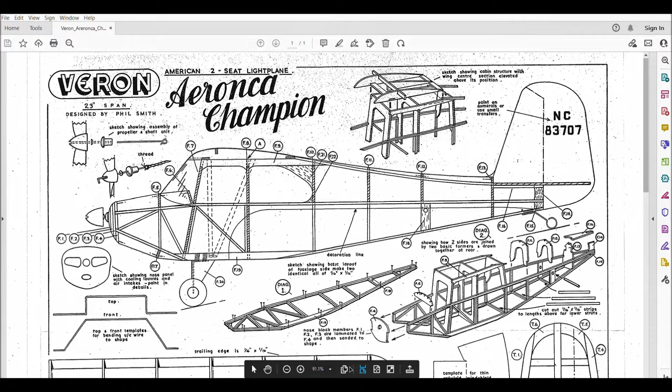Okay, this is the PDF I'm using from an old Veron plan. And I don't need everything, I just want all my formers and bulkheads and such. Oh, I didn't want to do that. What I want to do is just copy here.

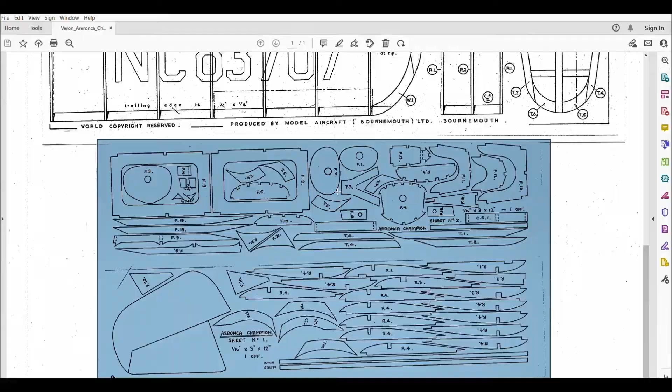And this is what I will paste into Inkscape. Okay, so now we're back to Inkscape. I will just paste the file back in place.

And I know that this is a 3x12 sheet here and a 3x12 sheet here, so that'll be about 7x12 is what I'm looking at. So I'll come over here and make this 7 - nope, I'll make that 12 width, and then 7 high.

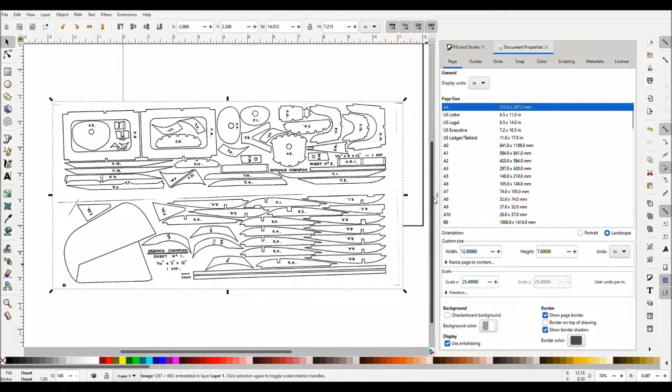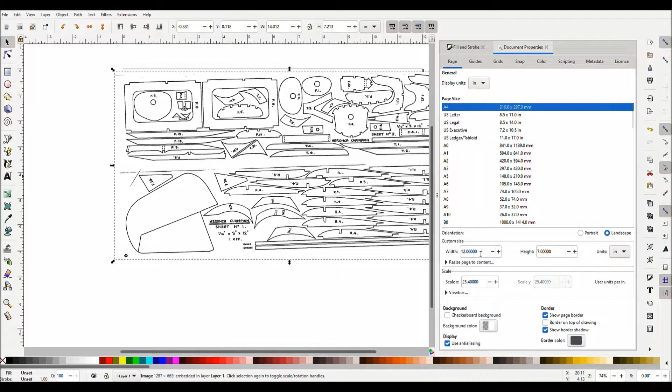And I will use this to close the sidebar. And we can see that this is approximately 7x12, not quite. We'll make it a little wider. Okay, so that's about right.

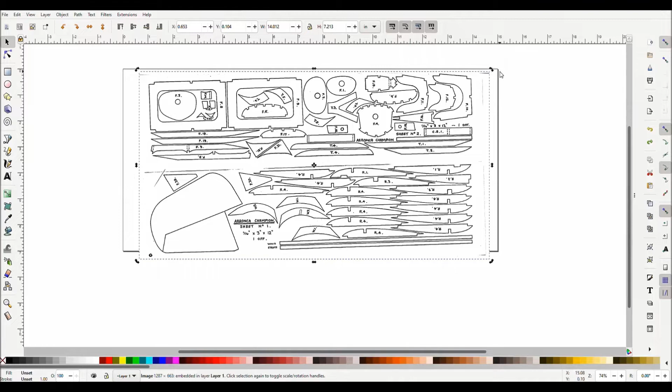But if I look, I see that this is at an angle. So what I can do is, when I select this, if I have my select and transform objects tool up here and click on it once, I can zoom in and out. But I'll just leave it at the right size. If I click on this a second time, I can now rotate. So let's just go ahead and rotate so that looks about parallel. That looks good to me.

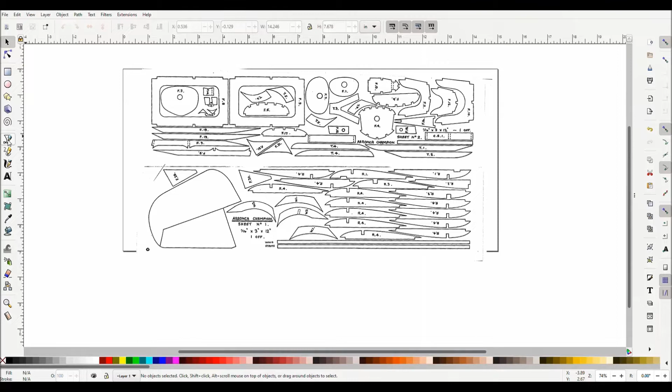So now we have the PDF we want to copy. Next thing we want to use is our Bezier tool. That's what I use to make all my points and vary my curves.

So I'm looking at my drawing and I want to start somewhere. I notice I have a whole bunch of R4 ribs. So what I'm going to want to do is copy one of those or trace around it, and I'll use that as my master. I'll just make more copies and move them around where they need to be on the program. It's important to pick one rib and use that as your master because, as you can see, this plan was hand-drawn 50, 60 years ago. So if you were to look at each one of those ribs and superimpose them, they'll all be just a little different. That's why I'm going to use one R4 as my master, and I'll use that also to compare R3, R2, and R1 ribs against.

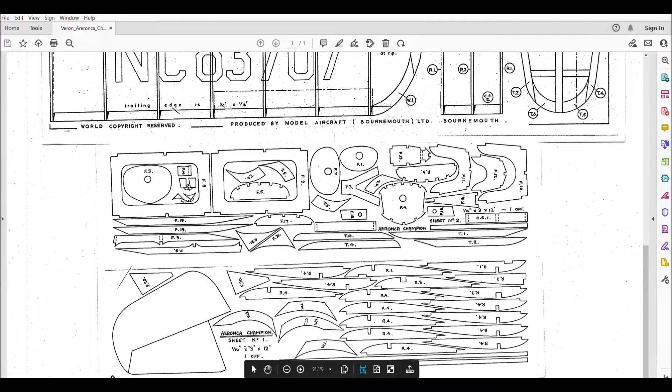Okay, I popped back over to the PDF because I want to make two more observations off this plan before I start tracing. I need to know the size of the cutouts for the spars and the leading and trailing edges. Everything is made out of 1/16 inch sheet for all the parts and for the leading and trailing edge. What I need to know is what the main spars are - the main spar is 1/8 inch by 1/16 inch.

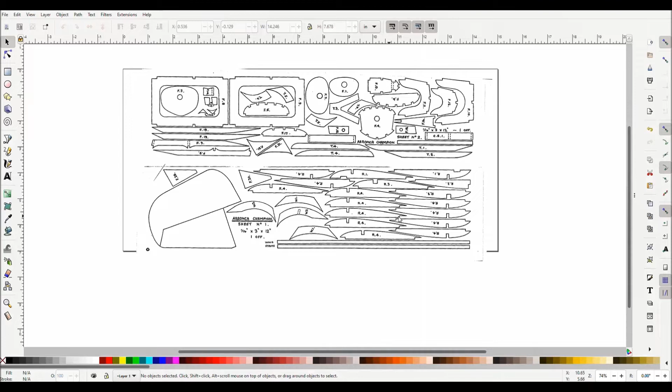Okay, we're back to our Inkscape program, and I'm going to start on my R4 rib. So I want to expand this so it's easier to work on. I have the cursor over it, and I will use my scroll wheel, my mouse, and my control key. I hold my control key, I scroll up, and it expands the screen.

So the fun part is we click on the Bezier tool, pick some point - I'll just start right here. Click on the first point, come over here and click on a second point. I'm going to go a little farther out.

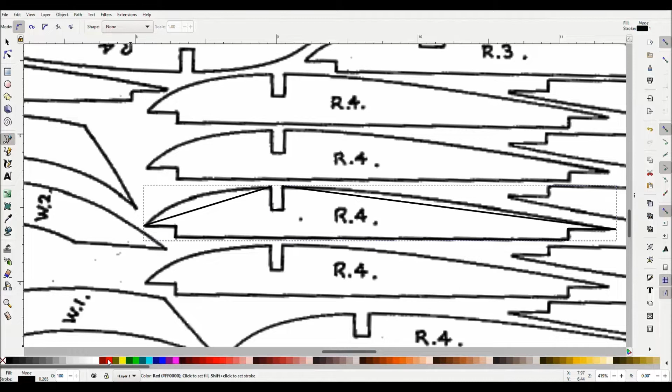Click across to the next point, down, across, up, leading edge, top of the spar cutout, so now I have my points, and it's hard to see in black. So I'm going to change that color. The way I do that is I come down to the color bar down here. I'll use red. So I'll hold down the Shift key and click on that. Now I have red.

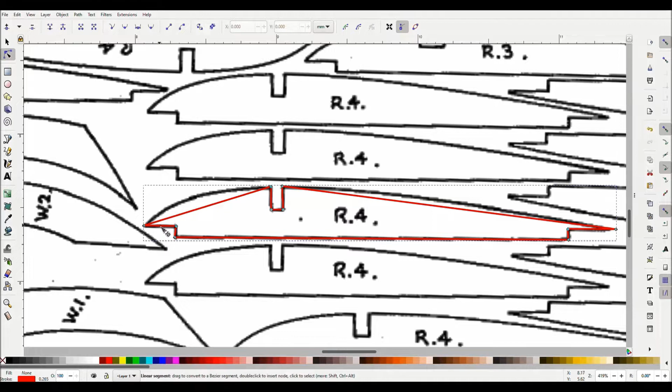So you can see I wasn't really careful about where I made the point because I knew I was going to be moving it later. So we go from the Bezier tool up to our Edit Path by Node tool. So you can see all the different little nodes there. So click on that. Now you can see all those individual nodes. And again, I'm going to use my scroll wheel and my control key, make it a little larger. And I'm going to make those nice and parallel.

And I said it's important before to know the rib size. So it's 1/16 inch by 1/4 inch. I'm sorry, that was 1/16 by 1/8 inch spars. So what I want to do is I want to measure across here to make sure it's 1/16 inch. And 1/16 inch is 0.0625 inches. So I'm going to do 0.07 inches. So I come down here to my ruler, click on that, and you can see a little X popped up. I can just come straight across, and I'm 0.08, I wanted 0.07.

So what I can do is I can just come back up here to my Edit Paths selection, and I'm just going to make that a little smaller. And I'm kind of clumsy, so we'll see how I do. Okay, that looks about parallel. Maybe a little off here. And we'll come back to our measure tool again. And we'll measure across. And I'm still at 0.08. I'm trying not to move too much. I have a tendency to overshoot when I'm doing this kind of thing. So that looks parallel still. Well, not quite.

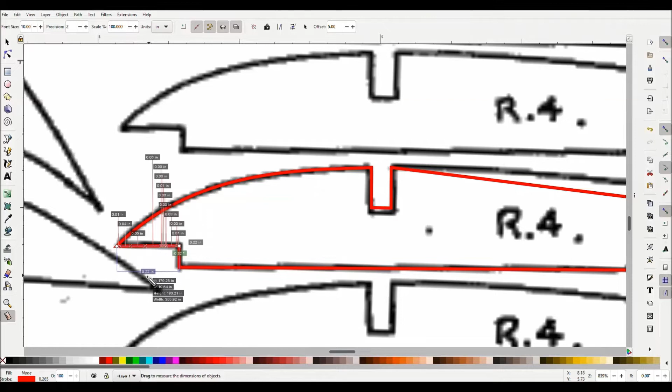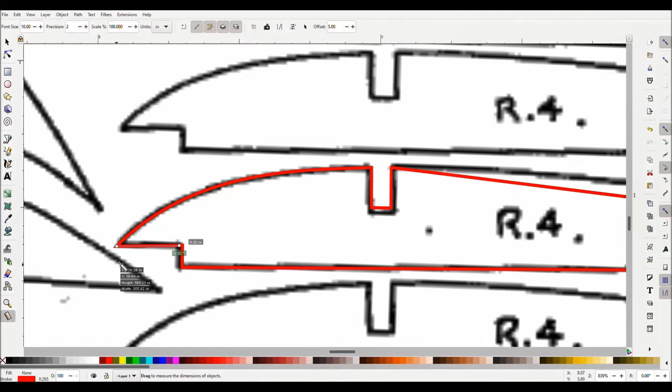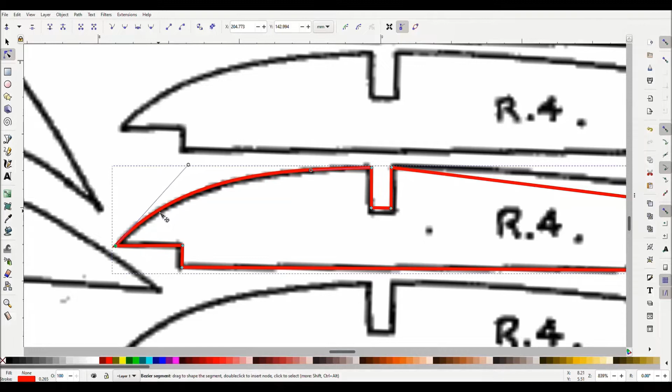And of course it should be 0.25. So we'll just say, ooh, 0.32, that's kind of long. Sorry, no, 0.22 right here. 0.22, we want 0.25. So let's go to 0.26 so we have a little leeway. And I give a little bit more. Go to our measuring tool. 0.23, we're still a little short. Let's move this forward point up a little bit. We'll measure again. .24, we're almost there.

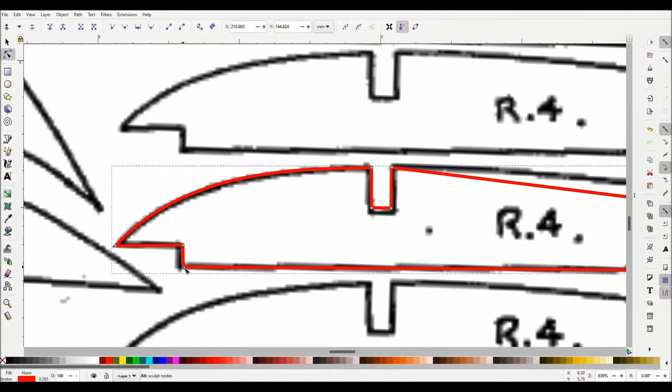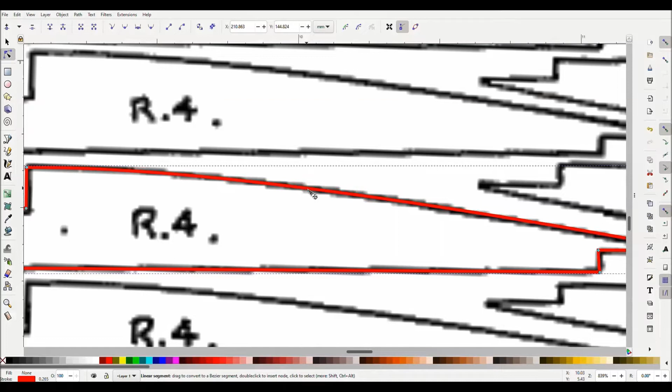Well, we'll leave it so that if it sticks out a little bit, it'll be a little more to fair in. That's close enough for me, and that looks a little off, so I'll bring it straight down. Okay, that's that front point. So now let's go over to the trailing edge. We'll just bring it over here. Okay, that looks about right. The reason I bring this out past where it stops on the drawing is just so that it is so sharp here, you got a little bit of wiggle room for when you round off that back end. So we need to make this match. We'll go ahead and just bring this over a little bit and bring it up to match. There we go.

And again, 1/16, we want that about 0.07. And it is 0.07, and we want from here to be 0.25. And we don't want to go back to this point. We're kind of long. We want it to be right about here. So let's bring that point in a little bit. And we'll move this back and see what we get.

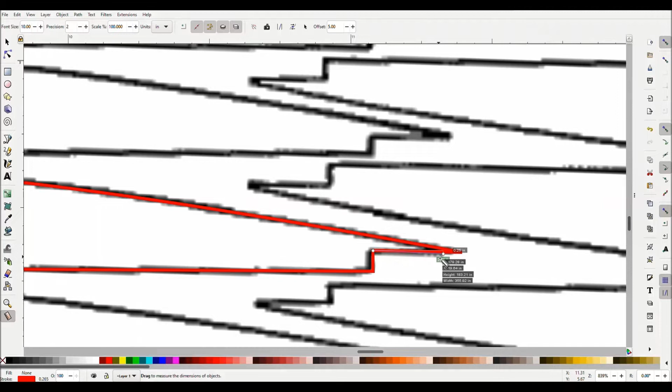And yeah, that looks about right to me. And you can see it's right about even with the outside of that black line. So we have our height and our length right for our 1/4 by 1/16 trailing edge. So now let's just take a quick look, see if it looks good to us by doing Control and scrolling down.

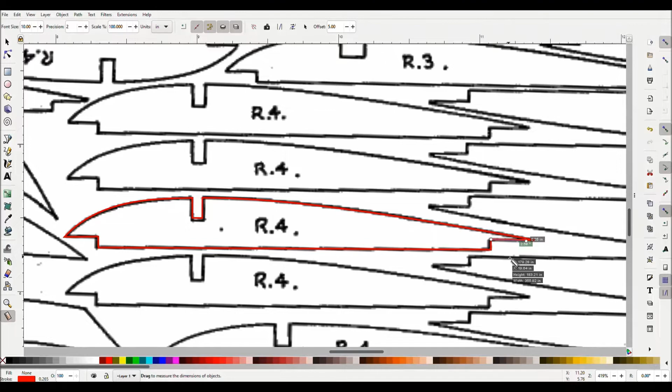Yeah, it doesn't match the black lines very well, but like I said, this is all hand drawn a long time ago and copied and copied and copied. But by doing the measurements, we know this is the right depth, that's the right length, and that's the right length. So that's how I do my initial rib, and that's going to be my reference rib. Okay, now we have our reference. We have the fun part. We'll just use Control and scroll wheel to make this a little bit smaller.

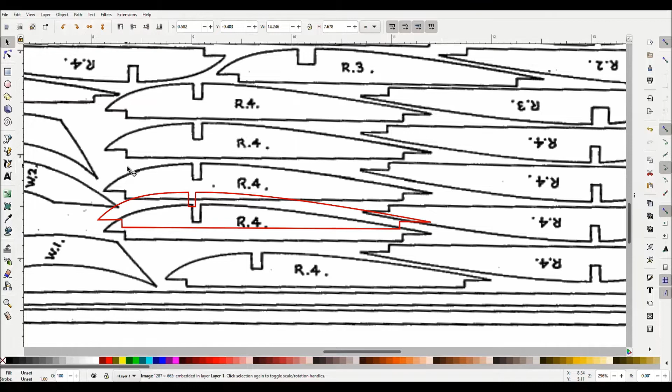We're going to do the select. I want to copy this all around here. Next comes probably the key combination I use the most, which is a duplicate. So when I have it over this highlighted square, I do Control D for duplicate. And now we're going to use my second most favorite, Control Z, which is undo. So I do Control Z and it snaps back. I had the whole PDF highlighted rather than just the one rib. So now I have the one rib, I will do Control D again and move it up here.

And you can see it's a little off here, but the mismatches are different on this rib. So let's do another Control D. Move it up to this one. And you can see the mismatch is a little different here. So when these are all hand drawn, each one of those ribs is drawn by hand, and none of them exactly match. That's why I did one reference rib, so they will all be perfectly exact.

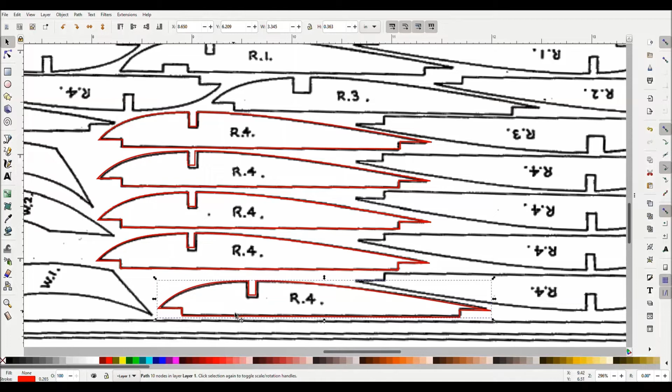So let's Control D, bring it down to this R4 rib, another Control D, bring it down, up, wrong again, so Control Z or Zulu, and then back in where I want to be. I'll highlight, Control D, I move it, and again you can see the mismatch is a little different on this rib. I'll zoom out a little bit. You can see I have to do 1, 2, 3, 4, 5, 6, 7 more.

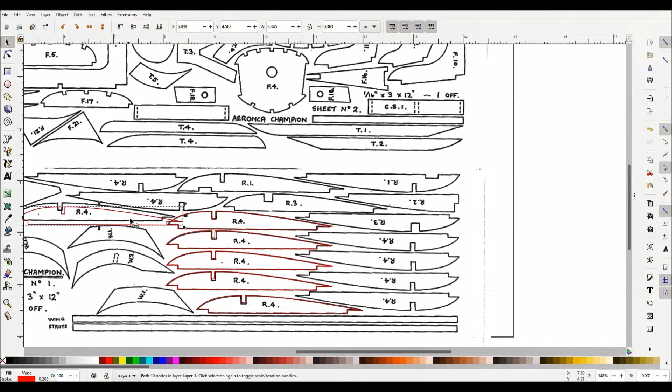So I'll Control Delta, and I'll move this over here. I'm having a hard time because it's trying to match these 2 points. So if you have that problem, just use your scroll wheel to enlarge the drawing. And I'm going to bring it over here a little farther. Because I have these 2 cuts overlapping, I don't want this cutting into that rib. So I'll move this one back just a hair. And it's not going to matter if it doesn't match the PDF, because we're going to be moving that out of the way and just show our rib profile later.

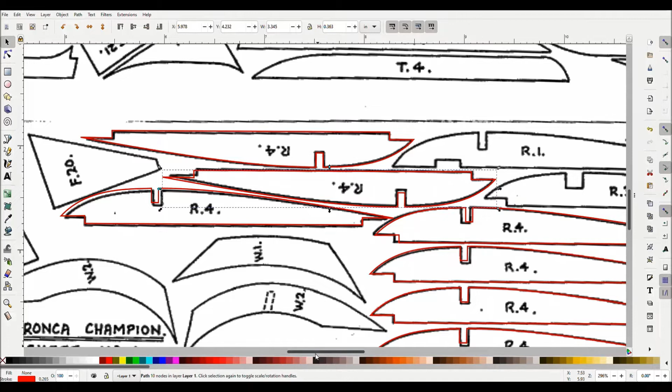So now we have all these upside down R4s. So I'm going to Control Delta, move it up, and I have my rotate up here at the top. So I will rotate 90 degrees and bring it down. Again, Control Delta. And bring it here. I'll do a Control Delta. I'm going to bring it down over here. And I know this gets repetitive, but it's necessary to make sure we get everything exactly the same.

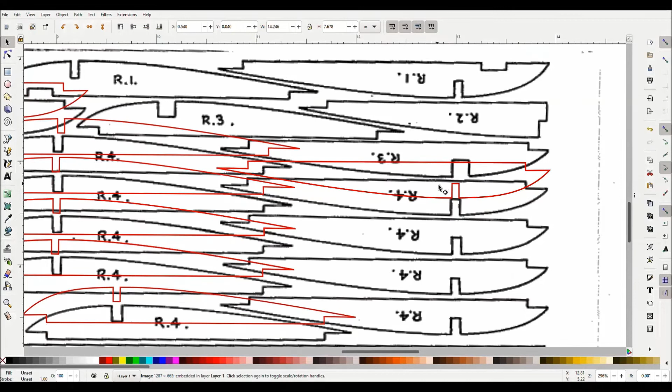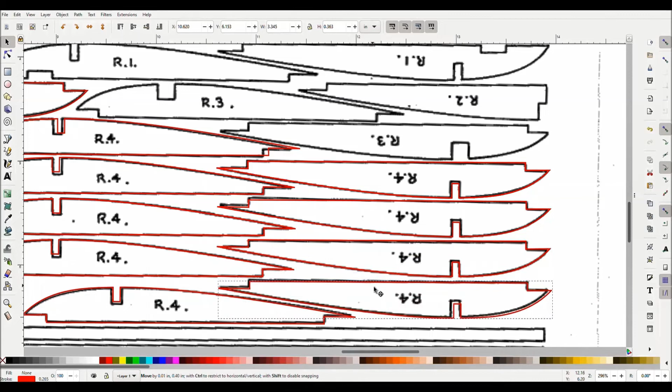Control Delta. Up. I got my PDF, so I'll do Control Zulu. Put it back where I want it. Highlight. Control Delta. Move it down. Highlight. Control Delta. Move it down. Control Delta. Drat. And I believe this is the last of our R4 ribs. So Control scroll wheel to zoom out. Okay, so we have all of our R4s.

Now, I said this is going to be our reference. So we have our R1, R2, and R3 ribs. If we look at our PDF, on the wing we have our R4 ribs and then an R3 rib. That makes the individual wing panels. The center section is made up of the R1s and R2s. But if you look closely, the spars for the center section do not match the spar of the wing panels. And that's intentional. They want this to overlap that when you're gluing it all together. But the trailing edge on all of these match. So that's going to be our reference point. So let's go ahead and go back to our Inkscape.

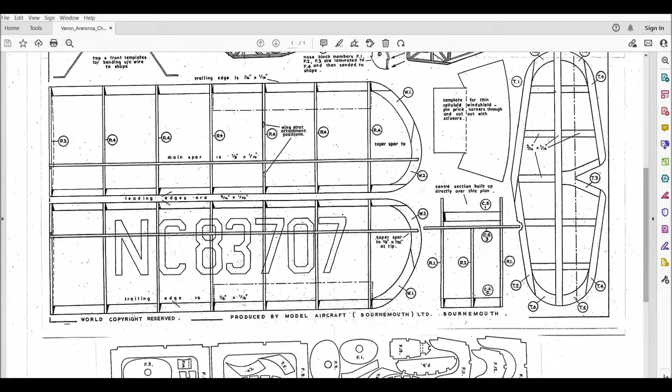Okay, we're back to Inkscape. And I know this is all kind of boring, and I wish I could make it more exciting, but I'm just not that exciting of a guy.

Once we get through the wing ribs, that's going to be the most tedious part. Then I'll go over a couple more parts, and they'll demonstrate basically how we do everything, and you should be able to extrapolate from there how to do the rest of the drawing. So now we're going to do our R3s and R4s together. And it's easier for this next part to change to a different color.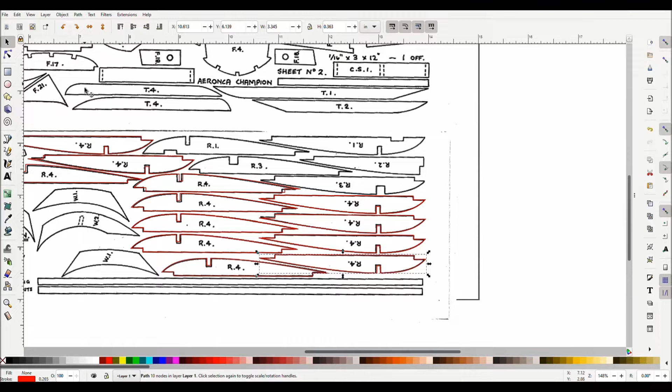So we're going to use our Bezier tool right here. And we're going to expand our R3 rib. So Control scroll wheel. And I'll start the nose this time. Click the spar. Notice this is much wider.

And I'm clicking at all the different points. And notice when I bring it here, the block turns red, and I click on that, and it tells me I've closed it all. So now that I have this, we said we don't want black. But since we're going to be doing some comparisons, we don't want red either. So let's pick a different color. I'll come down and I'll pick green. So I'll do Shift Green to get the outline. It's important you do Shift Green, and I'll show you why.

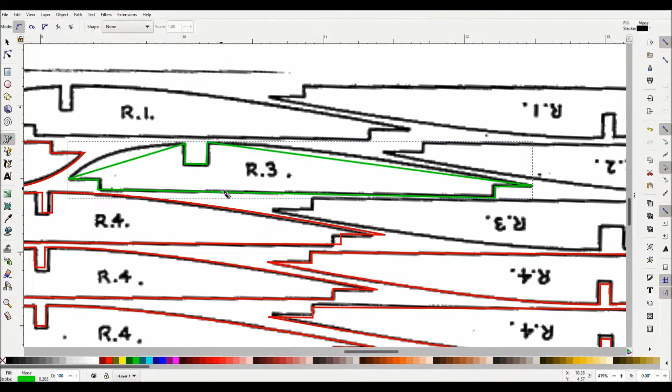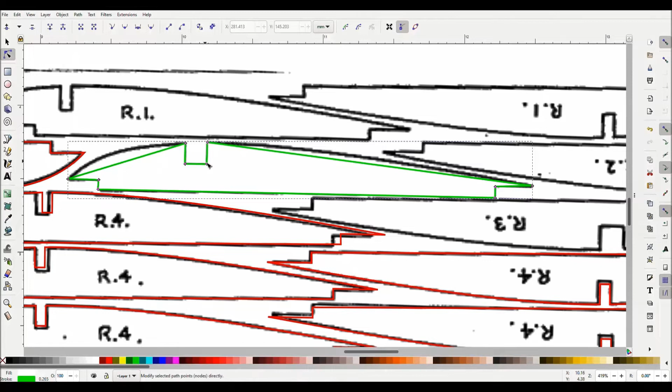We'll go back to black. And if I just clicked on green, I now have a solid, which isn't bad, it's just not what I want. So I'll click down here on white, and then I'll do my Shift Green. Okay, I have the green outline I want. I'll come up here to my Edit Paths, and we said this is 1/8 inch deep. 1/8 inch is 0.125, so we'll do 0.13.

So we do a quick measurement. That's 0.15. It's a little deep. So notice I move this, that little dotted line moves up and down. I want that line not to move at all, so it tells me that my spar depth is the same on front and back. So I need to go up a little bit. So 0.125 was what I wanted.

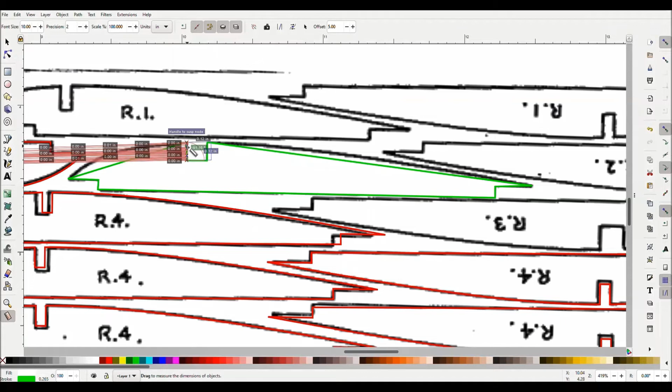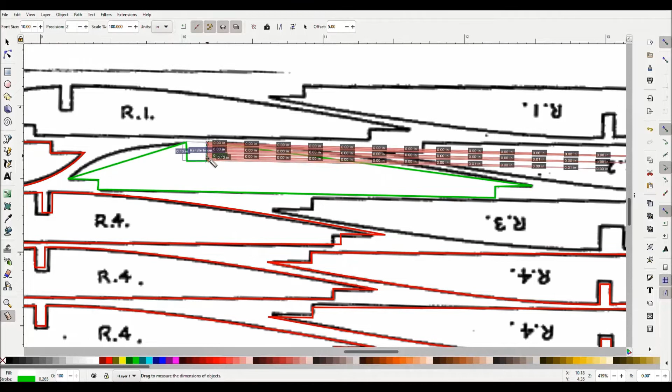Let's do this side. 0.14. And 0.14, and I'm looking for 0.13. So up a hair, that's probably a little too much, but we'll see what we get. Yeah, it was 0.12, that's a little too much. Nope, 0.13, 0.13. Okay, so we have the right depth.

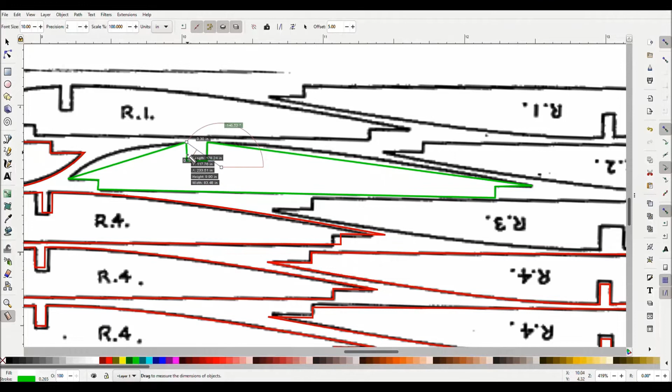Now the width. Remember I said we're going to have the 2 offset spars. Well, we have to have room for the spars from R4 ribs and also the R2 rib, the R1, R2. So each of those are 1/16, so I should have 1/8 apart. So this should be 1/8 of an inch, 1/8 of an inch being 0.125. We'll do again 0.13 if we can.

So 0.14, and this one seems a little larger, 0.15. Okay, so let's bring this back a little bit. And we're gonna come back to this later. I'm trying to get general. The reason being, we're gonna compare this to our R4 rib, since we said R4 was the master. So let's just go ahead and finish doing all our fairing in, and then we'll come back to that.

So let's do the front first. Let me just come down a little bit. And I click on that center green line. And I'm getting close. Doesn't have to be exact because I'm going to be changing it in a minute. Okay. Come back here. That's close. It's close. Okay, so this is my R3 rib. So I want to make sure that the R3 rib and the R4 rib shapes are the same.

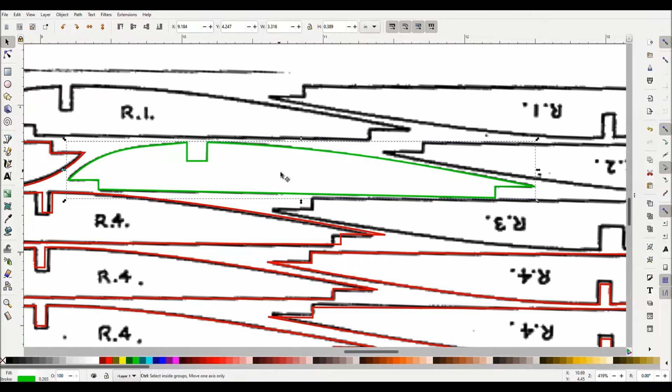So I'm going to take this one. This just move off the side. Let's take an R4 and let's make a copy of it. Control D. And move it over here. Okay, so now I have them together. Let's expand that using Control Scroll Wheel. Oh, a little too much. And now I'm going to do a comparison between the two. This will be my master. This has to match the curve of that.

So what I'm going to do now is I'm going to take my R3 and you can make it, I don't want to match. Well, I guess I can match at the top and work our way from there. So you can see they don't match that well. So let's go ahead and take our, let me click here on the green. And this is pretty cool.

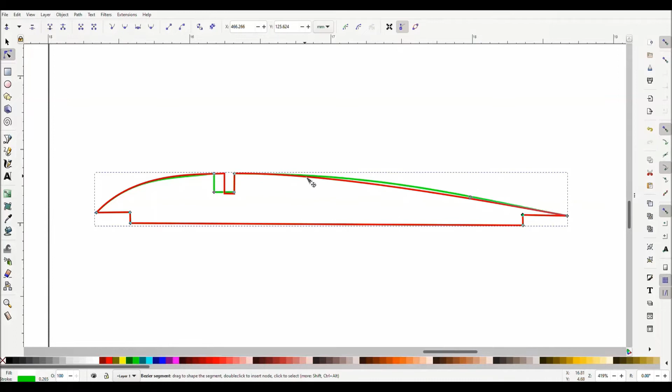All I can do is do snap, snap, snap, snap. Grab that green line and make it so it exactly matches, or as close as we can get. Same thing up here. And snap. And now we're going to grab this and make it nice and parallel. And let's see if we can make that curve a little better.

So now, except for the spar cutout, R3 and R4 are identical. And that's what we wanted. That's why we had R4 as our reference rib. Now we'll just take our R4 rib. Oop, I didn't mean to do that. So again, let's go Control Z. Control Z undoes what you did last.

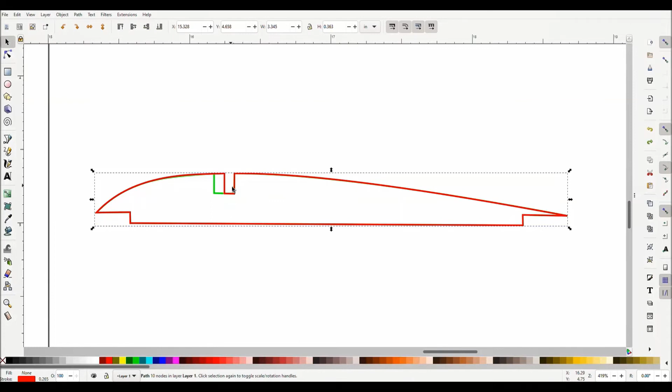And I'll do my select. Gonna select and just get out of the way. Now I don't need that anymore. I can just hit the delete key, and it's gone. That's one of my favorite keys when I'm working is delete, or if I made a mistake, Control Z brings it back. It's very forgiving. That Control Z is an awesome thing. But let's go ahead and make that go away.

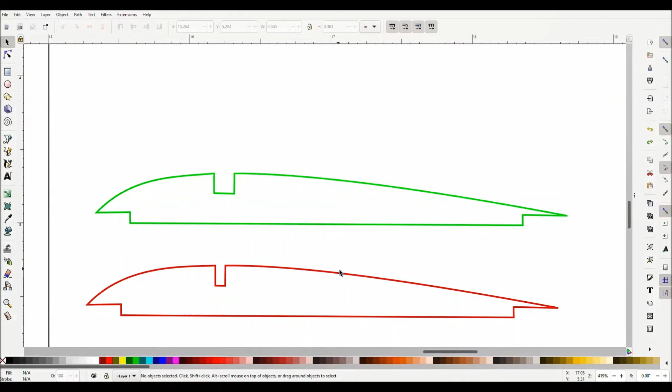So I know that these are right. I know that these are right. I know the height's right. I just need this width to be 0.13. So I'll come over here and let's measure. 0.14 is a little wide. So I'll come here. Do a quick measurement. Still a little long.

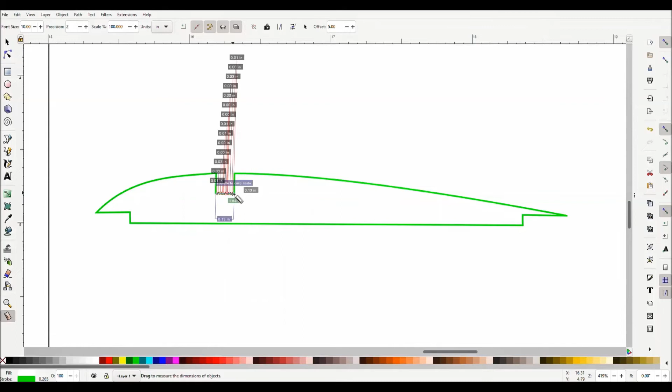So again, we don't want to touch this one because we match that to our R4 rib. Oh, 0.13, 0.13. So it's exactly what I want. And if you're wondering why there's a gap here and not back here, that's because when I rotated the whole drawing, I didn't get it exactly level. And we can fix that later, but it's not really important.

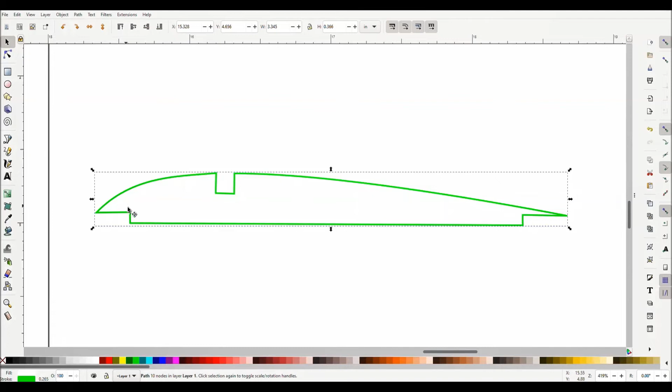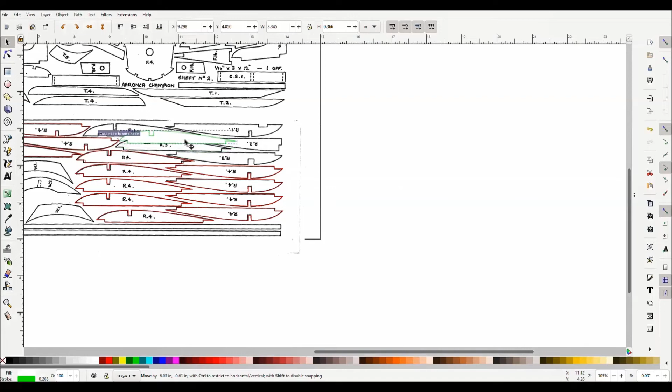So I will use my control scroll wheel. I'm going to scroll down. Up a little more than I wanted to, but I just wanted to get to where I could see everything. So I'll control scroll wheel back up. Select using my select button. So I selected it. I hate when I do that. So I'm going to move it over now for my R3. You can see it trying to snap together like it did a minute ago, those other nodes. So we'll expand it a little. And now it's where we want it to be.

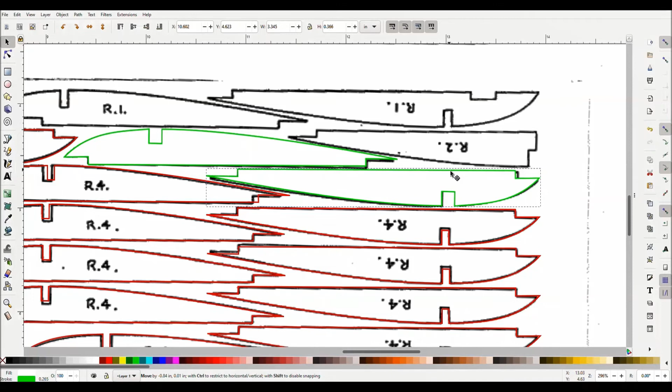Notice we also have another R3. So we will Control D. I hate when I do that. Control D. Move it over. And then we'll use our rotate to rotate it 180 degrees. Then bring it back in. Okay.

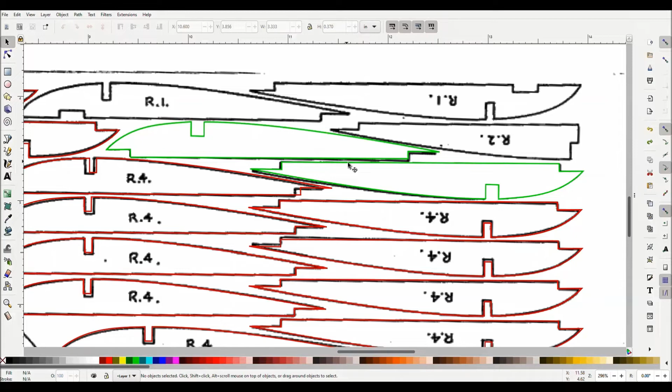Okay, now that we've done R3, let's just jump up and do R1. So R1 and R2 are our center section ribs. And they're going to be very close, but they won't be exactly the same as our R4 rib. So I probably should have left the R4 reference rib off to the side, but we'll go ahead and do that now. I will select R4, and I would just move it off the side. Leave that there for now for our reference. Now let's do R1.

If you remember, I was saying that the wing spars for the center section R1 and R2 are offset from R3 and R4, and we'll see that in a minute. So let's go ahead and do R1. We'll do our Bezier tool, and again we'll start at the front. And notice where R4 has that front leading edge cutout, R1 does not. So that's going to get to us in a couple minutes. We'll see that.

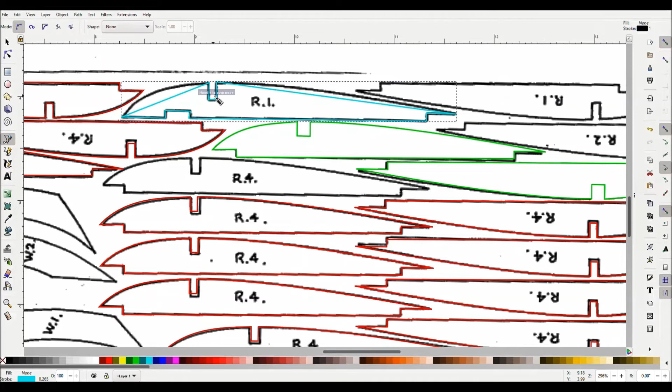So click, click, click, and when it gets to red, I'm ready to close out the loop. Okay, let's pick a different color this time. Let's use the light blue. So shift, left click, now I have a light blue. So we'll try and match these up a little closer this time. I'll go to my edit, and let's zoom in a little bit. Okay, let's see if we can get that.

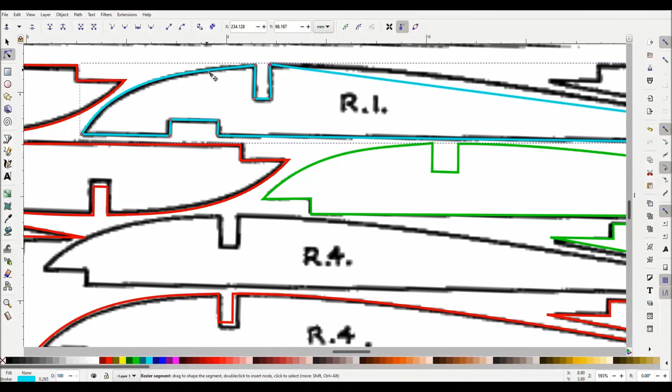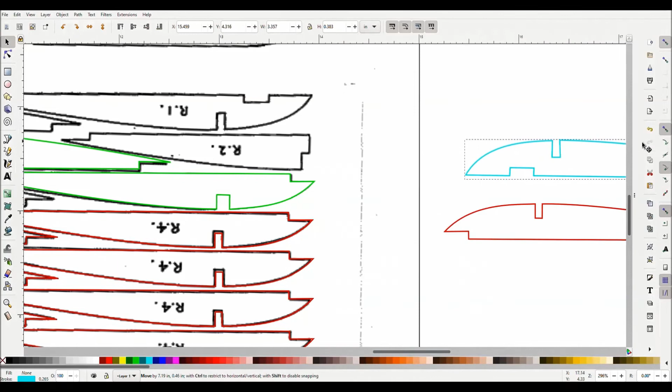And these need to be close. We'll do a little tweaking a little later. Okay. That one up there. Okay, it looks about right. So now we'll go ahead and move this over alongside our reference point, which is the R4 rib. And now I'm going to just superimpose. And they're close. This one's kind of at an angle.

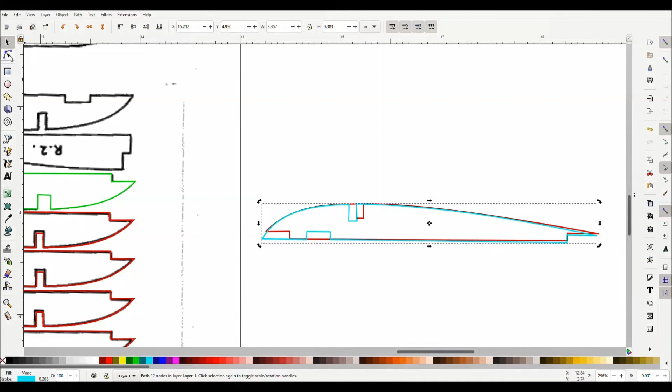But notice we were saying that the center section spar is forward of the wing panel spar, and you can see right there. So now I'm going to start the back. Just snap, snap. Oh, sorry, wrong one. Let's get this back over again. Have to use my Edit Paths tool in the upper left. So now I can snap. So snap, snap, snap. That's snapped. I'll bring this up. And let's zoom in a little bit and get that right on.

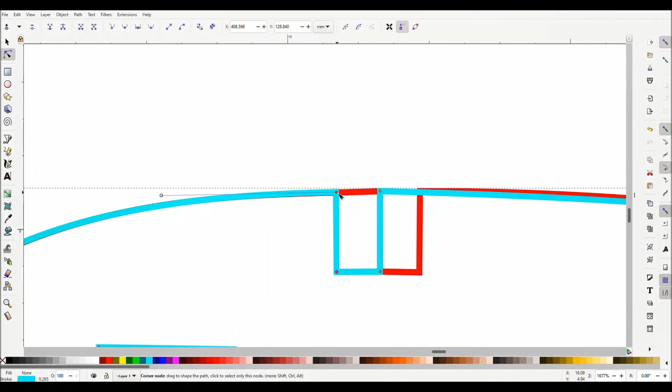And here it's going to be a little different because you can see this is going to come all the way down to where that 1/4 by 1/8 would be. So let's zoom in a little here. Okay, let's bring this up a little bit. Bring that one up a little bit. And let's bring it over the side a little bit. There we go. I don't know what I did. I don't know this program that well, so let's just snap away from it real quick. And there we go. That's what I wanted to do.

Like I said, I don't know anything about Inkscape other than what I've played around with, and this is not a good Inkscape tutorial. This is just showing what I do on mine that I am self-taught.

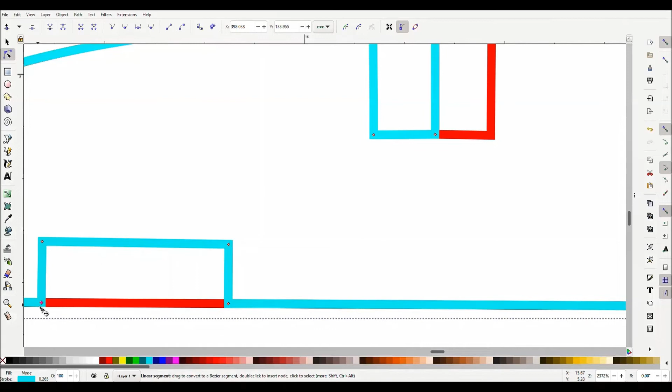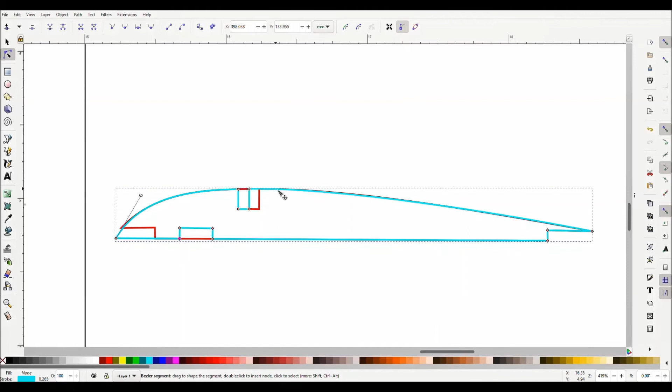Okay, let's go ahead and zoom out. Come over here. Well, let's do this. Let's make this match. There you go, that's pretty close. Close enough for the model we'll be making with this. So now I have to bring this in. I didn't quite want that, but

As you can see, I'm not very good at this yet. So forgive me if I'm not very good at it just yet. Yeah, you get the idea. I'm just not that good with it.

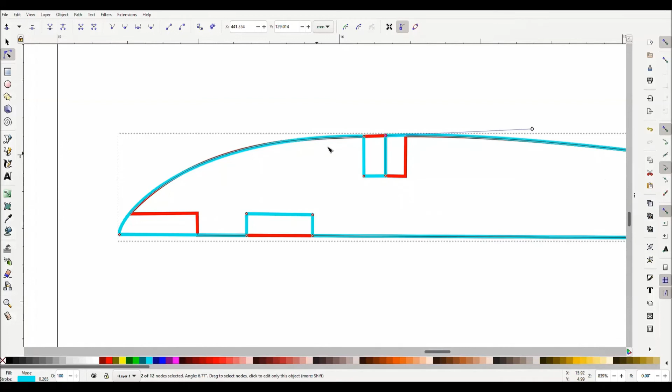So you see how I snap everything together to make the ribs match. So now that I've done that one, I'll move it back over. So I select. There we go. And I need to make a copy of it. Control Z, Control D, and then I will rotate and bring it in.

Then finally this R2 one, I'll just go ahead and do this again. You can skip through the video and go wherever you want. I know this is getting really long. I'm gonna have to edit it down some, but I just want to show you how I did ribs and just make sure everything was nice and aligned.

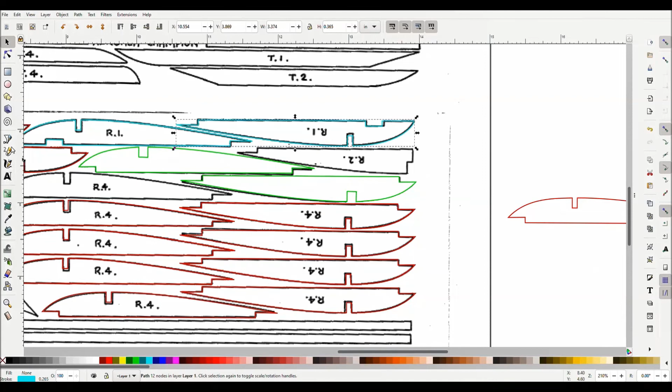So I'll do the R2 real quick, and I'll use dark blue for that one. So I'll do Bezier tool. Shift dark blue. Now Control scroll wheel up. Select. Make it close.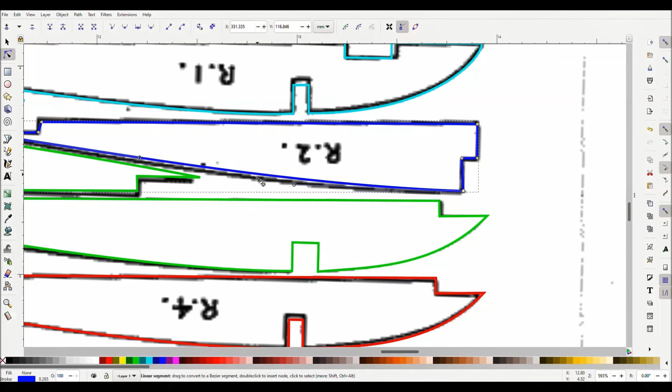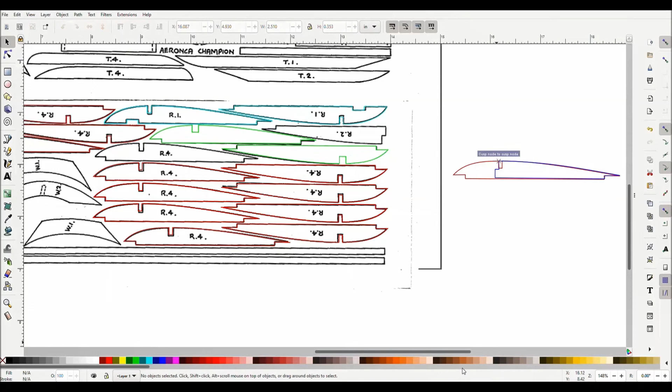Okay, so it looks good. Scroll out. Rotate it. Bring it down. Zoom in. And we're going to select. And we'll snap it together.

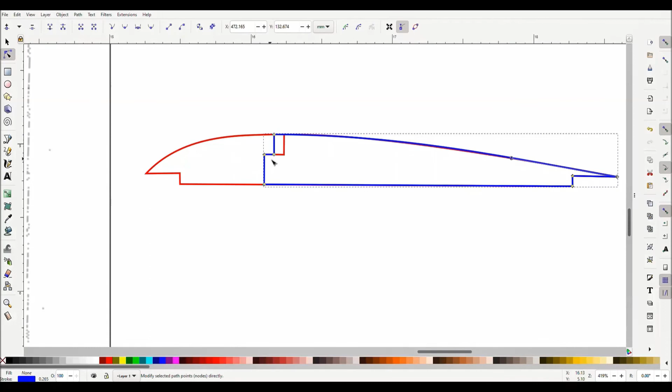And again, since the front has the static spar forward of the wing panel, that's like we want it. Let's bring this one down here. And that's my R2. So everything should be fine. I'm done with my ribs. I'll just move this one back. Select it. Actually, let's rotate it first. Zoom in. Drop it back.

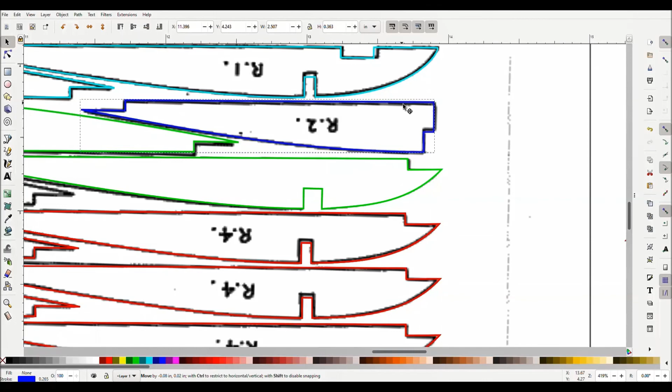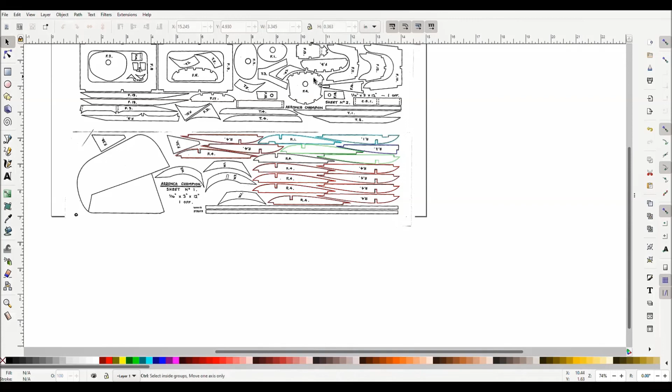Now I have all my ribs done. I'm not going to do a whole lot more. I'm just going to show something that's a little more complicated. Like we'll do this one and this one just so you can see. And once we look at those, that should be pretty much the way for doing any of them. Okay, let's do these last two complicated shapes, and that should be good enough to show you how to do anything else on a drawing. So let's zoom in on this R4. Use our Bezier tool again. Start over here, just point, point.

Okay, so I have all my cardinal points. I'll just do red again for this one. So shift, left click red. And now it's just using our edit button and cleaning things up the way we want.

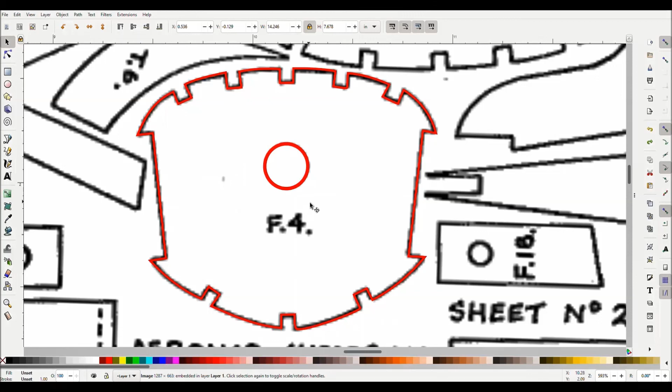And we'll zoom out, and we'll do this last one to demonstrate how to do this. So I'll do my Bezier tool again and click all of our points. And now, since it's a little bit of a compound curve, we'll just do a point here, so I can separate those.

I close it out, and since I like red, I'll do Shift, red, and now I will pull in my curves using my edit paths. Go ahead and grab this and pull it in.

And this may not look perfectly smooth, but if you look at the drawing in front of us, this is about 12, 14 inches. In reality, when you print that out or cut it out with your Cricut, that's going to be about 1.5 inches. So if it doesn't look completely smooth here, when you shrink it back down to size, it'll look nice. Okay, so that's how I would do a compound piece like this. And that's it for the drawing. You can figure out the rest and make a nice, pretty little SVG file.

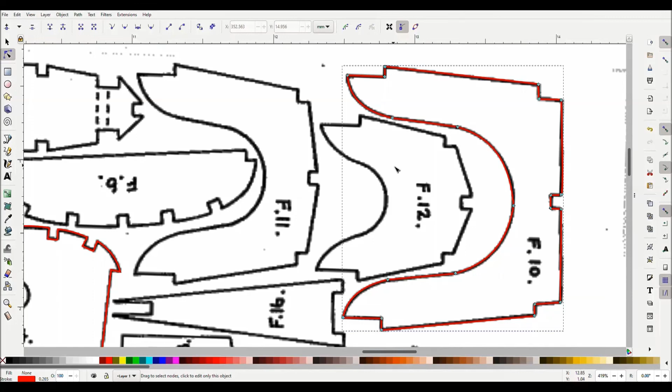So what I'm going to do now is I'm going to save. I probably should have been saving as I went along, but we'll save it as, and I'm going to use what I call my tutorial folder, and I'll call it tutorial. And normally when I'm doing this, after I draw each one of these, I'll do a save. I'll save 50 times, but at least I don't lose anything. Okay, so that's how we draw. Next, I'll go into how we do this in Design Space, how we import it.